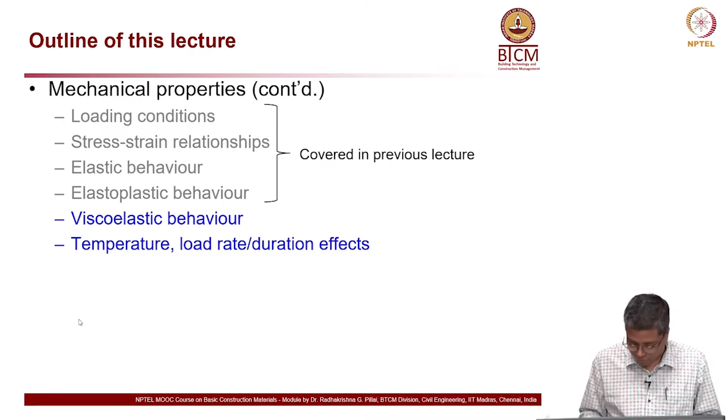So, what is viscoelastic behavior? This is essentially simultaneous viscous and elastic responses, when materials behave in that way, and there is a delayed response to the stress or load applied. What it means is, let us say you look at the three graphs at the bottom. The first one is on elastic behavior, the second one is on viscoelastic behavior, and the third one is on

pure viscous behavior. Now, in the first one, which is on elastic behavior, stress is proportional to strain, and you can look at that graph where you have the red curve, which is the stress curve, as a function of time. Now, the blue or the dark colored curve is the strain. So, you know which is the stress graph and which is the strain graph as a function

of time. Now, you can see here the maximum strain is occurring at the same time when the maximum stress is occurring. So, there is no lag between the stress and its effect on the material, which is strain. So, the time lag is insignificant or almost 0 in case of elastic behavior, or there is no phase difference.

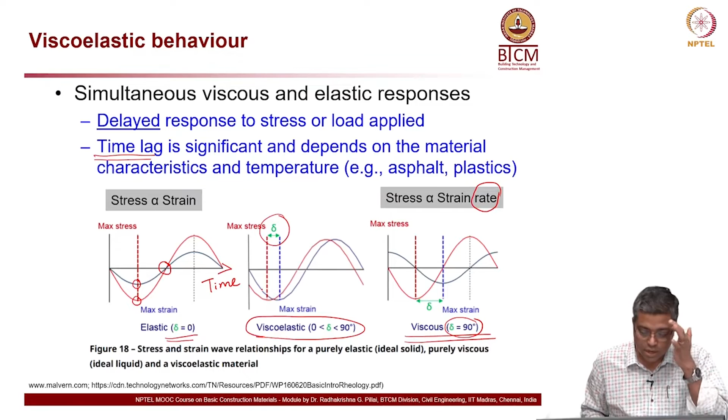That means, if you look at it carefully, the strain follows the stress applied. There is a lag to the reaction to the stress which is applied; if you look at stress as action and strain as reaction, you can think of it in that way. Now, here is an example to show this viscoelastic behavior. You can see this lag here.

Let us say look at this sketch here, you have different time instants. So, at time t1, this compressed region of that spring. This is a slinky toy which you might have seen. When you play with this toy, as your hand moves down, it is not necessary that all the points along the spring are also moving downward. You might notice that when your hand is moving downward, some portion of the spring is actually moving upward, because it is still just about to react to the previous action of your hand which was moving upward. So, you can imagine that scenario.

So, here you can see from T1 to T6, this compressed region of the spring is actually moving downward, whereas the particles can move up and down. And here also you can see some compression waves, and here are the dilation waves.

So, if I delete that, these are the dilation waves, or those regions are experiencing some expansion. Anyway, the point is that if your hand is moving forward, it is not necessary that all the points in this spring are actually moving forward. Some points might be moving backward. So, there is this delay in the response to the action by hand, okay.

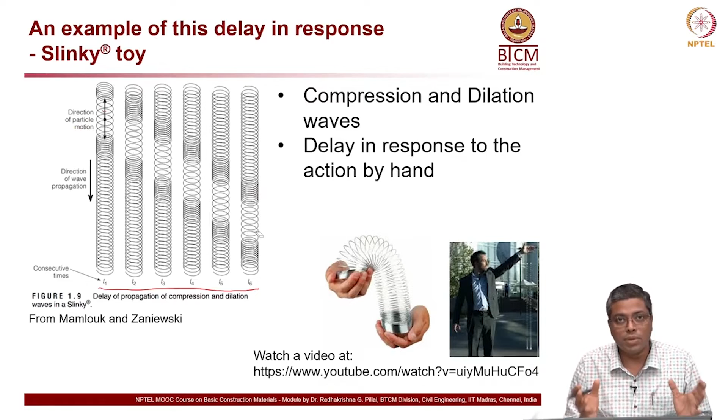Now, this is a very simple example to show you what this viscoelastic behavior and that time lag which I mentioned in the previous slide means, okay. Now, when you go to real materials which we use, the first thing to look at is what is this viscosity, and then how it affects the rheological behavior.

So, now what is rheological behavior? Rheology is the science of the deformation and flow of matter or materials. Now, what is viscosity? It is a measure of the resistance to flow. Look at the examples here. First you have water, then blood, then you have oil, and then on the right hand you have tar or asphalt or bitumen, or similar material.

Now, viscosity is the measure of resistance to flow. That means, if you think about water and oil, which are probably more familiar to you, water is less viscous than oil, even if it is hot. So, you can look at the numbers here. This is the viscosity 1 centipoise, whereas for oil it is about 100 centipoise.

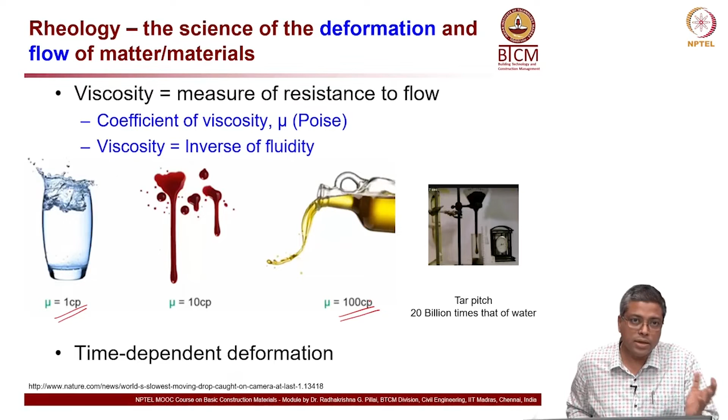Okay. Now, another thing is, this is again a time dependent phenomenon. Time dependent deformation is what we are looking at. Between the load applied and the reaction by the material, there is a possibility of time lag. Now, here I am going to show you two examples which are probably the longest laboratory experiments which have been conducted, especially in this area.

So, you can see the first experiment was started in 1927 in University of Queensland in Brisbane, and now 80 plus years have passed, and only 8 drops have been formed. In that experiment, what they did is they put the bitumen material or tar and then allowed it to form the drop and fall by itself, without applying any load. So, it is all under gravity load.

Now, how long does it take for each drop to form? About 7 to 13 years. Okay. Now, what happened is in 2000 there was one drop and they missed that drop, the camera could not capture it.

Another experiment of similar nature is happening in Trinity College, Dublin. That started in 1944, and it is again an experiment on tar, or pitch in this case, and high viscosity and low flow is what they are studying. And actually the last fall was captured on camera, and you can see the video on this website which I have given at the bottom left corner. You can go to that link and watch this video on this experiment.

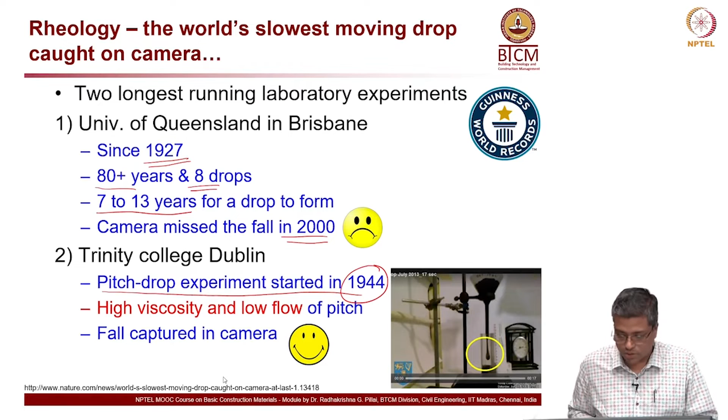And two more concepts here. There are two types of fluids when we talk about their shear rate and stress. One is a Newtonian fluid and the other one is non-Newtonian fluid. So, what is Newtonian fluid? Look at the graph here. You have shear rate on the abscissa and shear stress on the ordinate. Now, here the Newtonian fluid is the one which is following the green line.

This one. Okay. Now, the green line, the shear stress is proportional to the shear rate or strain rate like we discussed earlier. So, there is this proportionality constant and that is a Newtonian fluid. One example is water.

Now, these are linearly viscous materials with the rate of deformation proportional to the stress which is applied. Incompressible materials, and they do not recover the shape once deformed, even after the load is removed, because we are talking about plastic deformation and not elastic deformation. Okay.

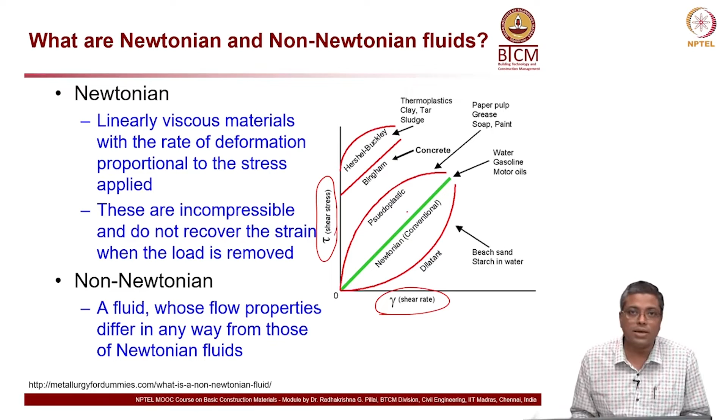This is plastic deformation. Now, non-Newtonian fluids are fluids which have properties that do not match with the Newtonian. So, that means anything other than the green curve over here, we can call them non-Newtonian fluids. I will go to the next slide.

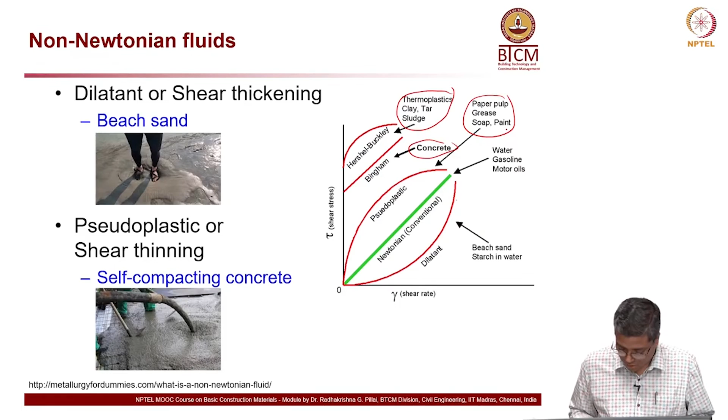Now, viscous behavior, which is permanent deformation due to short term loads. When we say a material is viscous, we are thinking about short term loads. Here short term load means the time of application of load is very, very small.

Now, in case of traffic, let us imagine you have a truck or a car moving along a road. Every wheel of that vehicle is going to move on the road at very high speed. So, if you take one point over here on this road, the time for which that wheel load is applied is very, very small, a fraction of a second. It moves so fast, right. So, that is what short term load means.

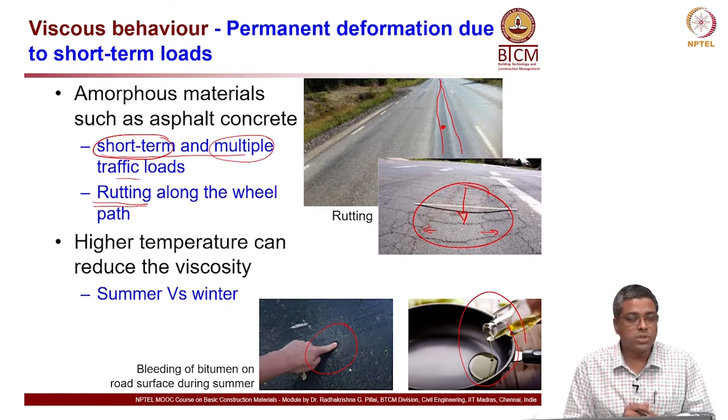And a very familiar example is oil: when you heat it up, it is going to flow easily. When it is cold, you might have even seen the oil frozen in the bottle in the winter season. So, definitely viscosity is a function of the temperature.

Now, another behavior which is important here is creep. Here also we are talking about permanent deformation, but this is mainly due to long term sustained load, not short term load like in viscous behavior, which we discussed in the previous slide. Where does this typically happen? In materials with ionic, covalent crystals, and also amorphous materials. Examples are concrete, wood and metals.

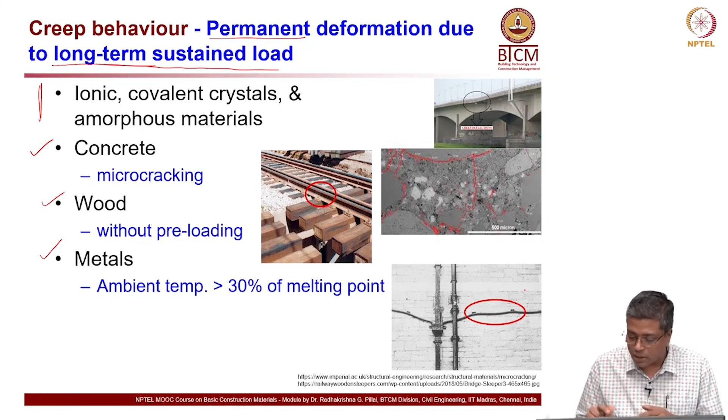Okay. Now, another example is about pipelines. Look at the picture here, but the same picture I am going to show in the next slide, so it will be more clear there. You can see inside the red region the pipe is deformed. Originally, it was a straight line between the clamps. This is clamp 1 and this is clamp 2.

Okay. So, originally it was placed as a straight line, and then as time passes, the weight of the pipe or the fluid going through it was continuously acting downward, and because of that it started sagging. We call this sagging creep behavior, because it is a permanent deformation, not just elastic deformation, and this sagging happens over several decades. Look here, the first case is 75 years, the second case is about 70 years. So, this becomes a very important factor.

Creep behavior is very important for any structural element or any material if your structure is designed for several decades. If whatever you are building is meant to last only a few years or a couple of decades, maybe creep is not, but it depends on the structure. I am not going to say it is not important; it depends on the size and shape of the structure, various factors, because the cumulative deformation is what we look at. So, it is very important to consider, but unfortunately some places do not consider it, and then we see a lot of problems like this, and it also affects the aesthetics.